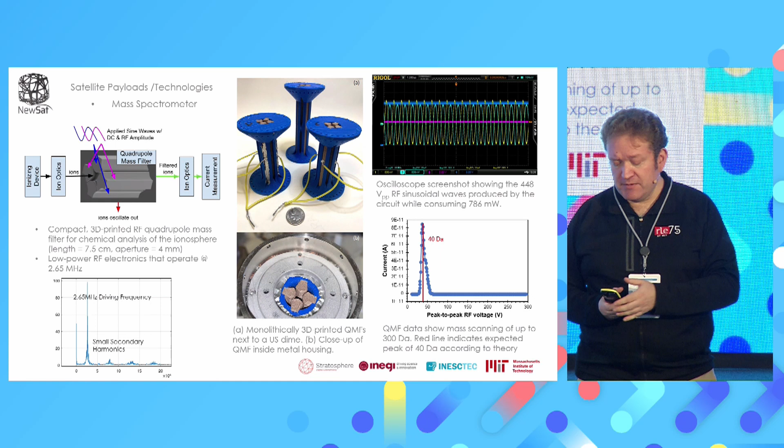In terms of sensors, we have been developing a mass spectrometer. I'm not sure if you're familiar with the technology, but it's the gold standard for analytical chemistry. If you want to know the quantitative composition of something, you use a mass spectrometer. There's a laser, but I can barely see it, so bear with me. In the upper left-hand corner is a schematic of one of these mass spectrometers.

You need a charged mass in order to manipulate it with an electromagnetic field. So perhaps you have an ionizer, or perhaps there are ions already present, which is the case of the ionosphere. The ionosphere is plasma, so we don't need to use an ionizer. Once you have these ions, you can use all kinds of strategies to sort them based on the mass-to-charge ratio, then detect them, and with that you get your spectra.

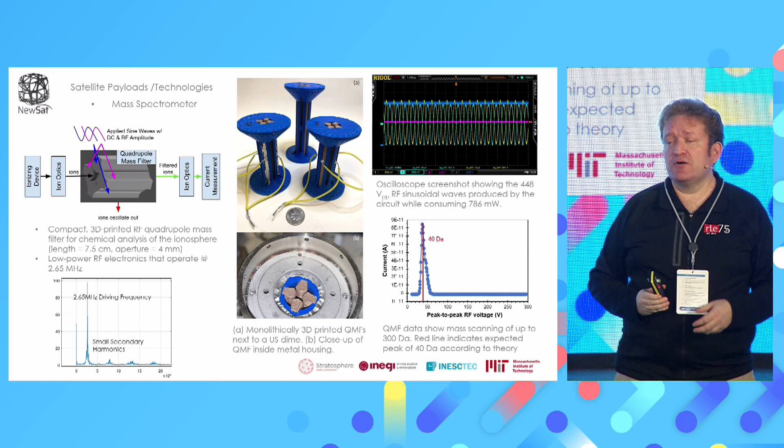So what we did is develop a mass spectrometer based on a quadrupole, which is a type of mass filter that uses RF, radio frequency, signals to filter. I think it's very neat work because it's fully and monolithically 3D printed. You see at the center, at the top, those are the 3D printed quadrupoles.

They're made in a polymer that's called PLA. The part that is like golden, it's the conductive part. So you can actually modify the PLA with nanoparticles to make it fairly conductive, of the order, I don't know, milliohm centimeter, very, very decent electrical conductivity. And then with that, you can make electrodes and all kinds of structures that exploit electromagnetic field phenomena.

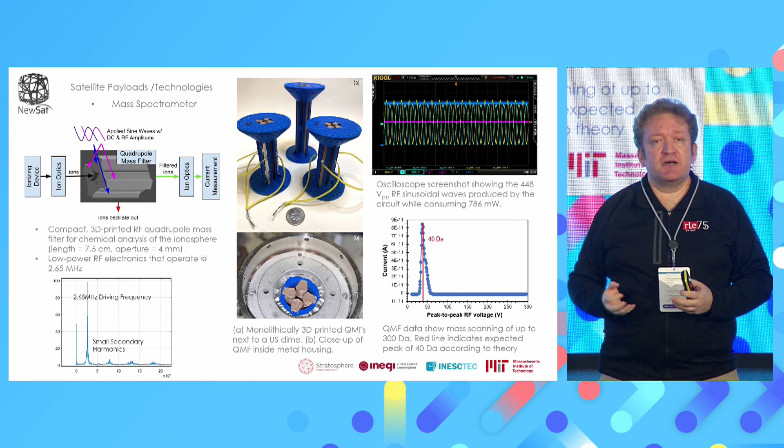It's monolithic, so it doesn't require any assembly. So it just comes like that from the printer. So it's something that is compatible with in-space manufacturing. So there are printers at the space station right now that could do something like this.

And then we also did a lot of work in the electronics. Because maybe you have seen presentations where the gadget is very tiny, but you have like a rack of instrumentation to run it. So that was not what happened. What happened is that we actually put together something that would comply with the limitations of a CubeSat in terms of power and in terms of the size.

So it works at 2.65 megahertz. The screenshot at the top right is to show that these tiny electronics can actually deliver the voltage, which is hundreds of volts at 2.65 megahertz. It consumes, if I recall well, on the order of a fraction of a watt, like 0.8 watts or something.

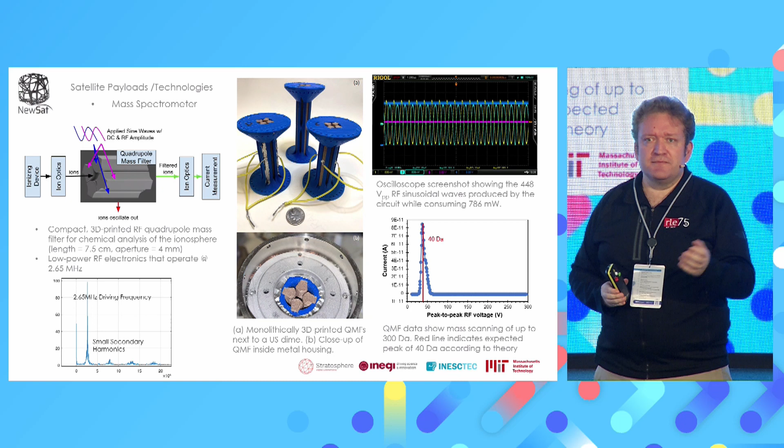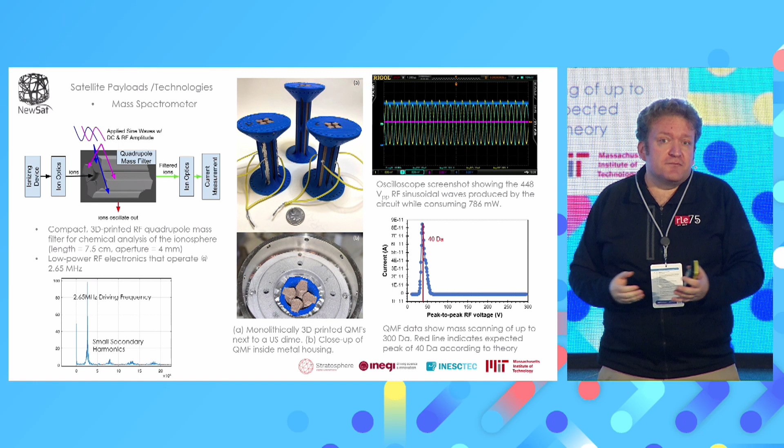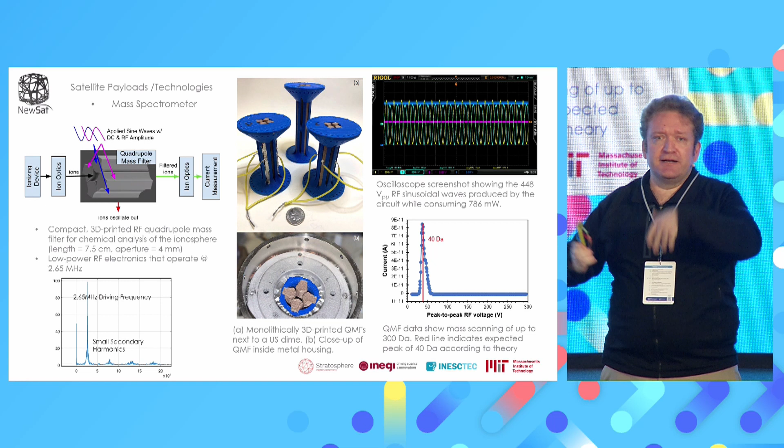And this is an example of the kind of data you can get. So we can sample up to mass 300, but you only see one peak, which is the peak of argon, which is what we were looking for. So in the ionosphere, we're expecting gases like argon, hydrogen, oxygen. So it has adequate range for what we want to see, and it would be fully disposable because the quadrupole is made of polymer. So when you go into reentry, it will just get destroyed by the reentry process, right?

So let's shift gears and talk about a couple of sensors that we did for plasmas, for the ionosphere. So the first one is a retarding potential analyzer. It's a gridded device that basically is used to tell the ion energy distribution, but it can also be used as a mass spectrometer, because if you are in space in an orbit, you are at a certain velocity on the order of kilometers per second, 10 kilometers per second, something like that. And that's a relative velocity, so everything in that reference frame is at that velocity.

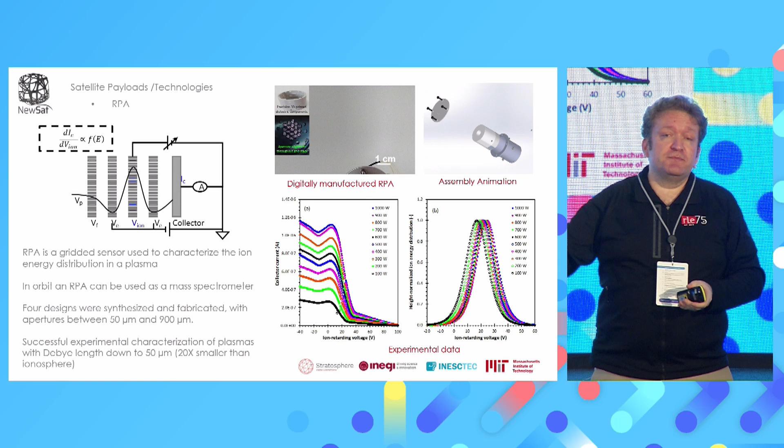So you're going to see shifts in energy based on the mass that you have. So if all the ions are moving at this relative velocity and they have different mass, then I should be able to pick it up by shifts in the energy with this device. So I think that's pretty neat because it works with DC signals, but allows you to do the kind of things that you can do with RF signals, which is what I told you about with the mass spectrometer. So this device is, well, you cannot see it there, I'm afraid, but it's fully digitally manufactured.

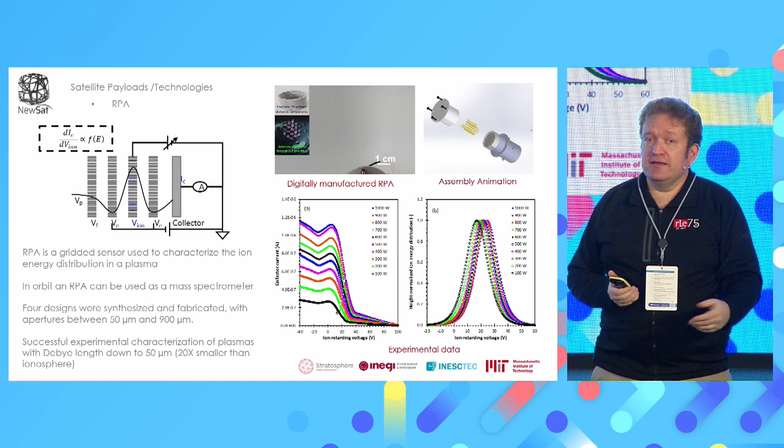It's using our top technologies and commercial technologies, on ceramics, on metals, etc. But I think the thing that is really important is that it works. What you see on the lower right-hand side is data that we actually got. And long story short, these devices work as good, if not better, than the state-of-the-art of RPAs. This is a very good proposition because they are very inexpensive to make, they can be made very quickly, and the bottom line is that they deliver. They actually can generate the data.

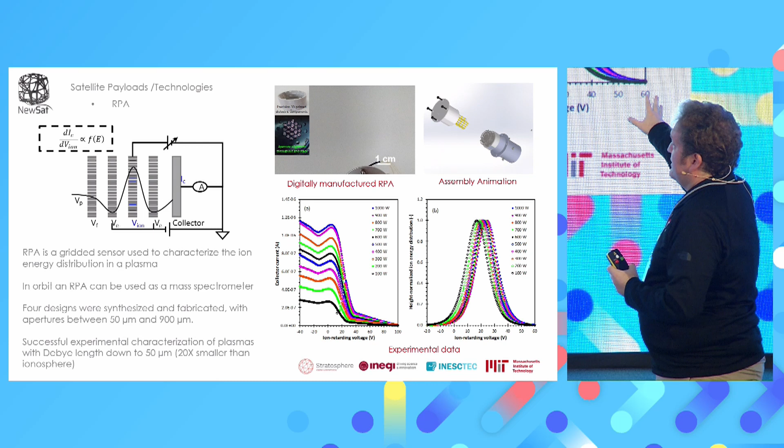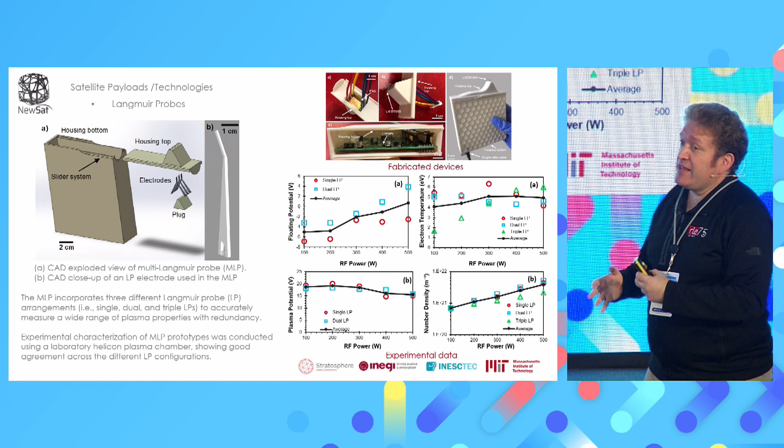So what you're seeing here is some IV characteristics, which is the workhorse for people that do electrical engineering to understand what's going on with the device. And what is at the right-hand side is the processed data showing the energy distribution. So this was done with a calibrated source, so we knew what to expect, and what we measured is what we were expecting.

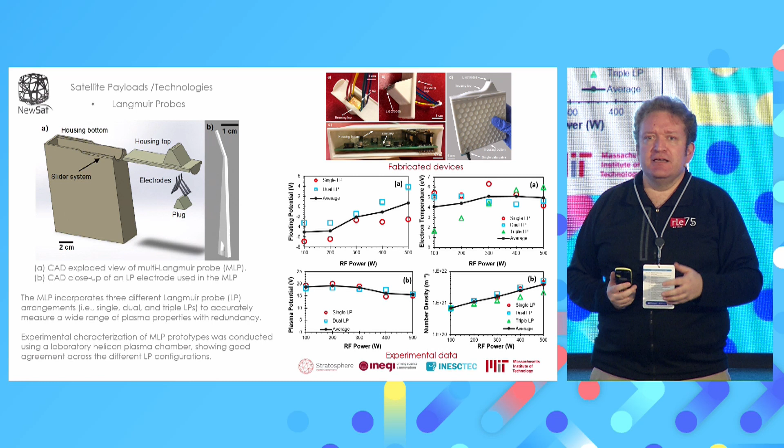The second sensor that we made is a Langmuir probe, and if you have worked on plasma, you know that Langmuir probes are really common sensors. They are basically electrodes that are biased at a certain voltage, and you collect a current, and based on the current and the voltage, you can figure out things if you make some assumptions, right? So there's some model behind it. But they are very robust, they can cover a wide variety of parameters, and people like them.

So we have our own version. It's also fully additively manufactured. We also developed the electronics to run it. I think it's also on the order of a fraction of a watt that it can consume. But it goes beyond that.

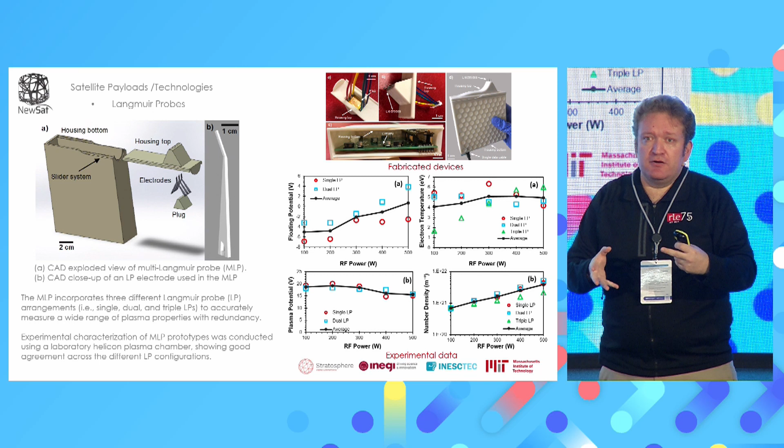It's really neat work because we have this redundancy in the probe, so we can measure in real time with redundancy the parameters of the plasma, let it be number density, electron temperature, the Debye length, etc. So what you see here is this sensor run in control conditions, and you see how the estimates from the different combos of sensors work together. So we have a single Langmuir probe, a double Langmuir probe, a triple Langmuir probe.

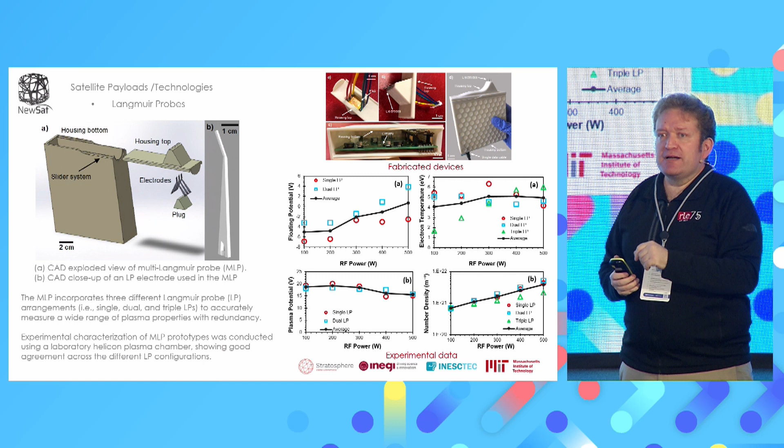And they have different features. So, for example, if you do a triple Langmuir probe, it's the only embodiment that allows you to make measurements in real time, and maybe that's what you need. But perhaps you want to be particularly resilient to perturbations. So in that case, you want to use a double Langmuir probe because it's floating, and then it allows you to basically get rid of these perturbations to first order.

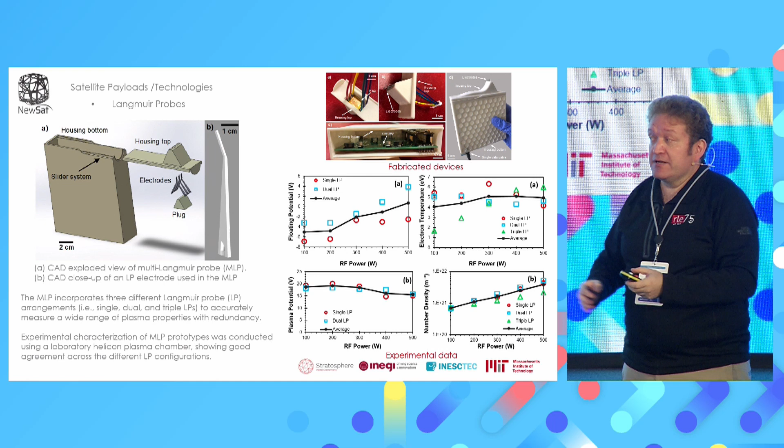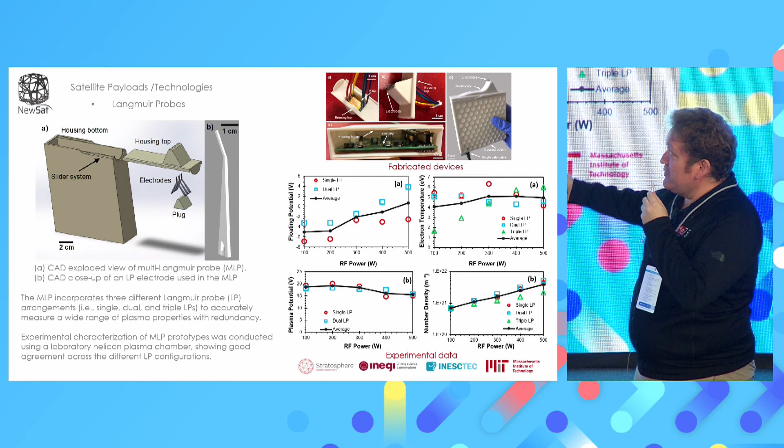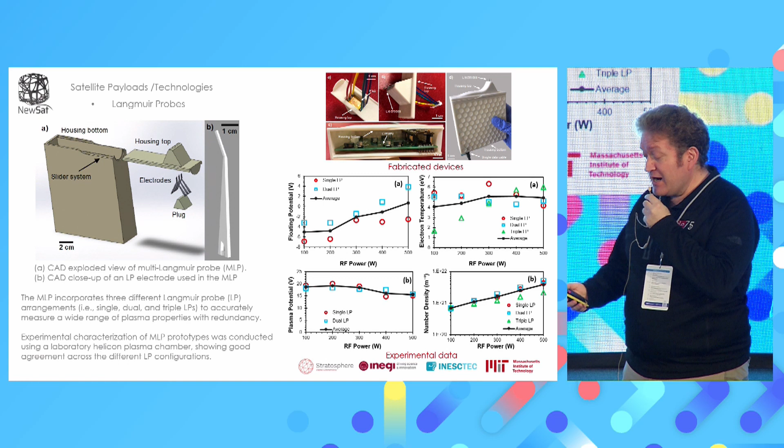But the important part is that the measurements agree. And it just shows this strength of using software like generative design and using the latest technologies in 3D printing to make really compelling hardware. So let's continue.

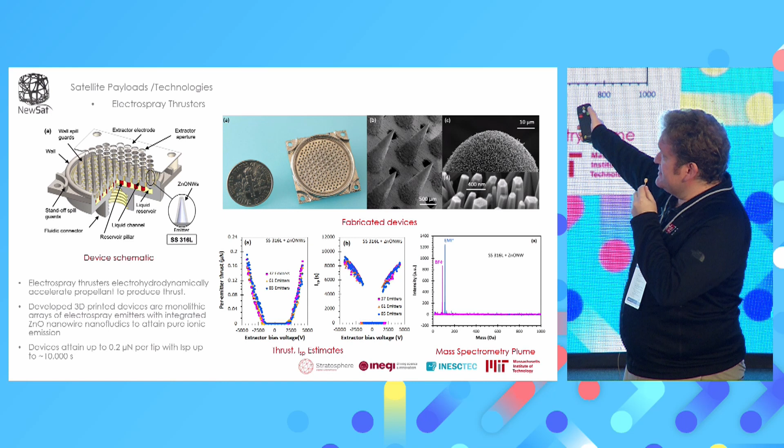And let me talk a little bit about propulsion. So in this case, it's an electric engine, so it uses electromagnetic fields to accelerate the propellant, and that's something that is preferred in space because it's more mass efficient, so you can get more thrust per unit of flow rate of your propellant. So once you're in space, you have a number of options, and chemical propulsion is not necessarily the best alternative.

So in this case, we use electric fields, and this is, again, a design that is monolithically 3D printed, with a certain set of features that allows it to take the propellant, distribute it, put it in the emission sites, and control it. But what is really, really exciting is what it does. What you can see is that it produces on the order of a fraction of a micronewton per tip. You can easily put thousands of these tips in a small area, in square centimeters.

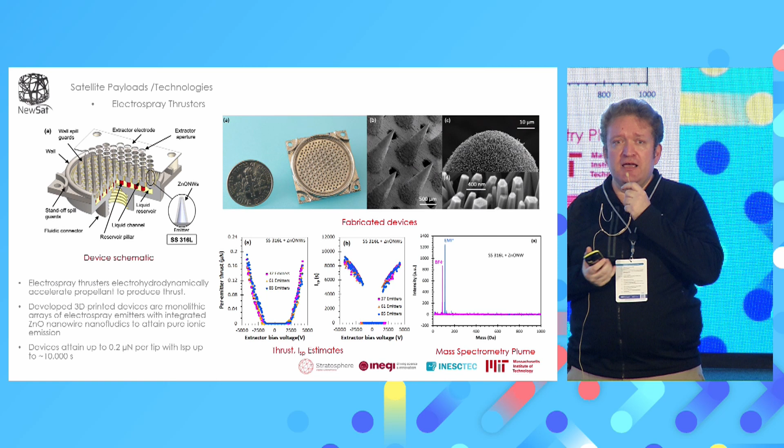And what it emits is these pure ions. And what is related is that this engine has the highest ISP, the specific impulse that you can get for this kind of engine, and it's because the emission is monochromatic. And we believe that was enabled by 3D printing and these zinc oxide nanowires.

Now let's shift gears and talk a little bit about other work done at MIT. The first one is led by Maria Yang. She looked into many things, but what I wanted to tell you today was about two key ideas. What she said is, okay, we have this excellent technology. How can we put it together? Meaning by that, human designers that are well versed in designing, and this thing called generative design.

So generative design allows you to do things like what you see at the upper left: you design something just by first principles, you get this, but you can certainly reduce the weight a lot more and perhaps be more effective if you use generative design, which is something related to artificial intelligence. So the first question that she wanted to address is whether the two things can coexist. Instead of bumping heads, can you guys just work together? And the answer is that, yeah, you can if you divide the work.

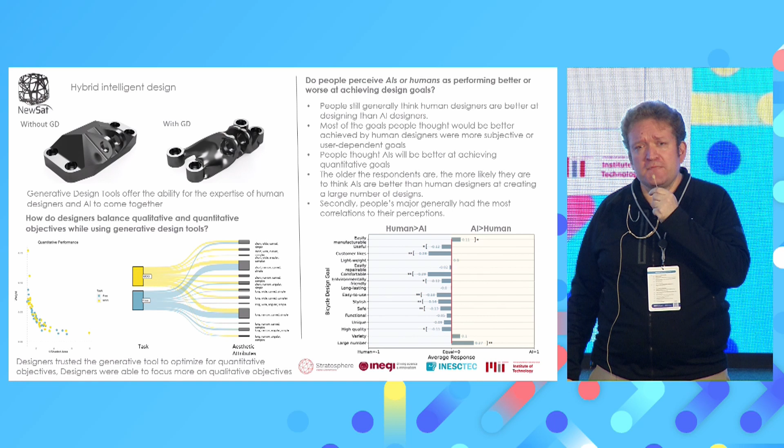And by that I mean whatever is quantitative, you can let the generative design do it. And the reason for that is that you can put in quantitative inputs. And whatever is qualitative, so does it look good, is it comfortable, is it practical, well, that's something more about having the human touch and the sensibility for that. So that was the first question that she successfully addressed.

The second one is, what's the perception? It's a very different thing. Perception doesn't mean what has actually happened, but what people think happens. And what she did is get a bunch of volunteers and ask, for a particular example of, okay, I'm going to make these bikes, and on the one hand, I have these engineers that are very well versed, and on the other hand, I have artificial intelligence.

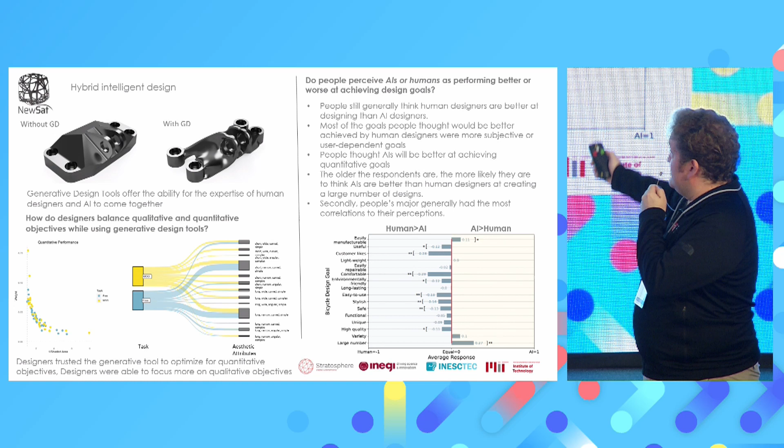So under these metrics, which one do you trust, which one does it better? And the consensus seems to be that people think that humans are better, except when it deals with things like mass production or things where perhaps the human capability cannot put up with that. Like, okay, I want to generate a great number of designs of bikes. Perhaps that's something better suited for artificial intelligence.

But I think another thing that is important, it was interesting in this study that Maria did, is that they found that the more you know, the more you respect artificial intelligence. So the older you are, perhaps the better you understand what it takes to put together a successful design, and then you understand that it's not as easy. And the more advanced your education, the more you respect the new tool.

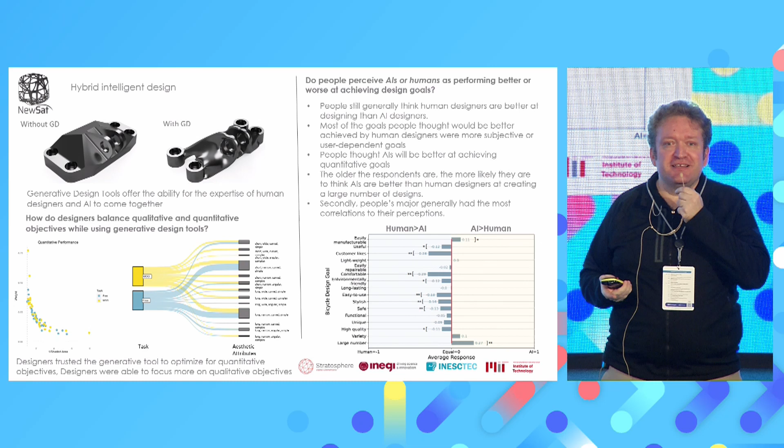Let's shift gears and talk a little bit about metamaterials, but with no intention to steal thunder. We're going to talk about that later in this presentation. But all I wanted to say is that Wojtek has been doing this amazing work on metamaterials. If you're not familiar with metamaterials, well, these are mesoscale structures. So at the micro scale, you have the molecules, the atoms. Then at the macro scale, you have the object that you are designing.

So these sit in the middle, and what they do is tailor properties, be it optical properties, stiffness, density, etc. And that's what makes them so exciting, that it's like creating new materials without actually having to create new atoms and new molecules. So if you want to use metamaterials to find some optimum, you have to go through a lot of iterations and a lot of possible cells.

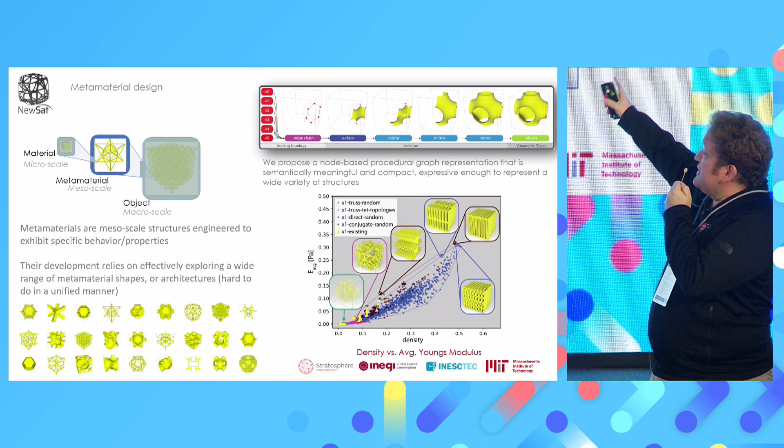So you see on the lower left-hand corner, there are all kinds of unit cells that you could try. And perhaps there are far more than you can imagine. So how do you go about that systematically? And what Wojtek and his team found is that there is a way to describe them with graphs that is very efficient, that banks on things like symmetry and similarity and mirroring certain structures. And with that, they have been able to show that the same structures can span a very wide range of properties, which is what you want, remember.

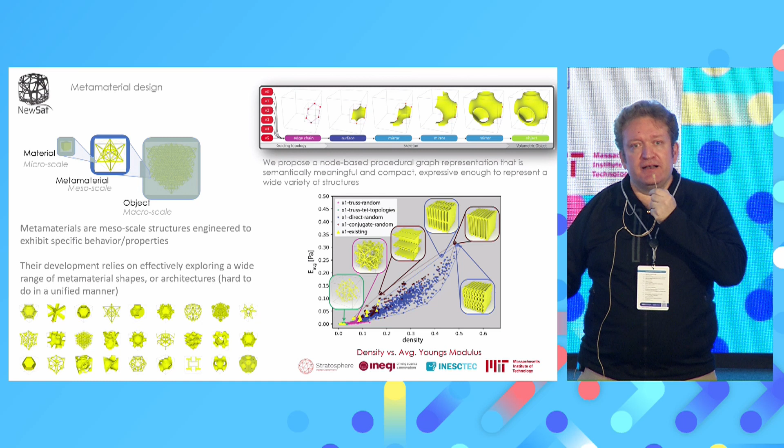So how does nature get the performance it has? Well, it does something similar to this. Everything is made with carbon chains, but perhaps they're packed in a certain way to make them stiff, and packed in a certain way so that they have these voids and perhaps can insulate better for sound or for temperature, etc. But it's basically the same molecules. So this is along the lines that I can use these cells and tune them so that I can span a wide range of physical properties.

And with that, I'm going to give the microphone to Nuno, and let's hear what they did with metamaterials and satellite testing. Thank you. So I'll see if I can, you've seen my back. I'll see if I can do this without losing my mic. But you can hear me well, everyone, yeah?

Okay, so let me just try to continue what Luis was saying with some of the things we've been doing. So one of the things we were doing in Portugal was thinking of a way to package these instruments in an innovative way that continues the trends in the project of looking into generative algorithms and additive manufacturing on every level of what we were doing, right? And in this case, we're looking at the structure itself. And I've got a small demonstrator here that we've done.

And to do this, we were really looking into advanced materials. And we were really interested, and we did a PhD on this related to the project, in how we could use topology optimization to work with continuous fiber composite materials. This is still new today. It's still an emerging field. But it was something we were thinking of in 2018 or 2019 when we wrote the project. And certainly it allowed us to get to some really interesting results. One of which was, for example, that compared to typical aluminum construction, the design can save around 35% of the weight.

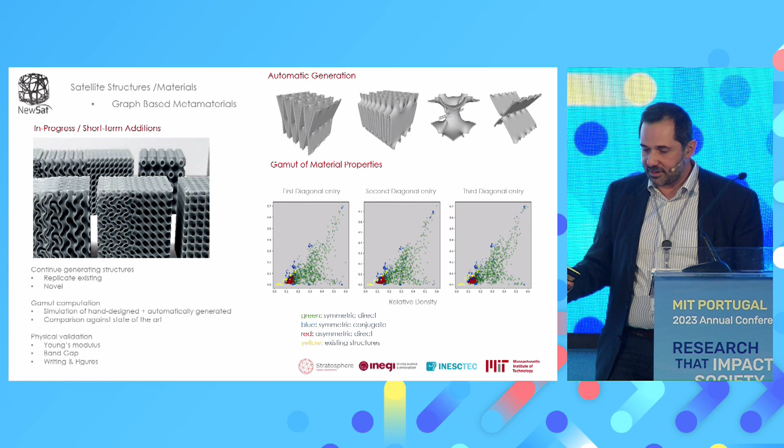This is something that I think is the continuation of what was being discussed. So there's a lot of work on how we can actually link the work that Matusik was doing at MIT with actually manufacturing some of these elements and understanding the properties of what we can get.

But I think, Gustavo, if you want to take the next stage. I can go from this side, probably. So this is what we have done in Stratosphere, what we call the more digital part of the project, let's say.

One of the things that was developed during the project is what we call a digital twin of a satellite. We have developed several things related to the implementation of a digital twin of a satellite. The first thing important to understand is that a digital twin of something needs something that will gather data on the spacecraft.

So what type of data can we gather? Things that come from the normal instrumentation that should be on the spacecraft, also from the payloads we are installing, and also from the structural behavior, which was the first idea really - just to have a very good understanding of the status of the structure after launching, and before and during deployment of the satellite.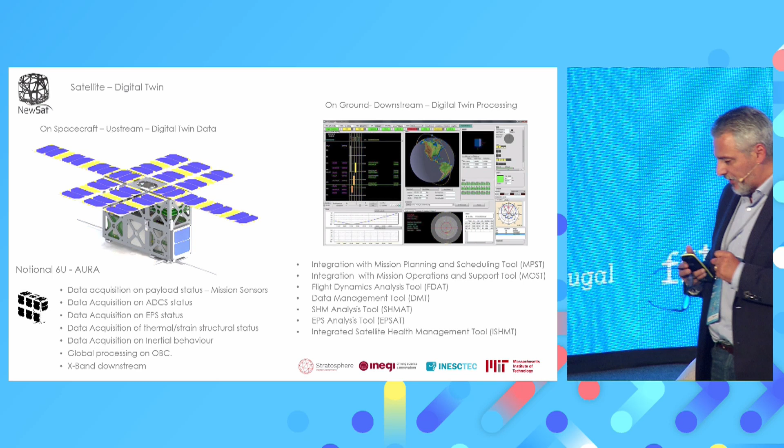So there are things related to what we put in the satellite and what we should communicate downstream to our ground control stations, to be able to understand better the behavior of the satellite under certain conditions. Two things to be stressed: first, during an orbit - and probably this is nothing new - there are certain points on the orbit where we can download certain information.

Some information is more important than other. Normally the status and health of the system is in the second layer of information that we transmit downstream. So we have to pick up what type of information we take from the satellite at each moment, and how we can reproduce the behavior of the satellite on the ground.

Passing to the ground part: there's something that gathers the data coming from the satellite and integrates it with specific tools you normally have when operating a satellite. This includes mission planning and scheduling, integration with operation and support tools, correlating satellite status with flight dynamics, a data management tool to track information over long operation periods, tools focused on structural health management, energy system behavior, and an overview of satellite status to determine if it's in condition to perform the intended mission.

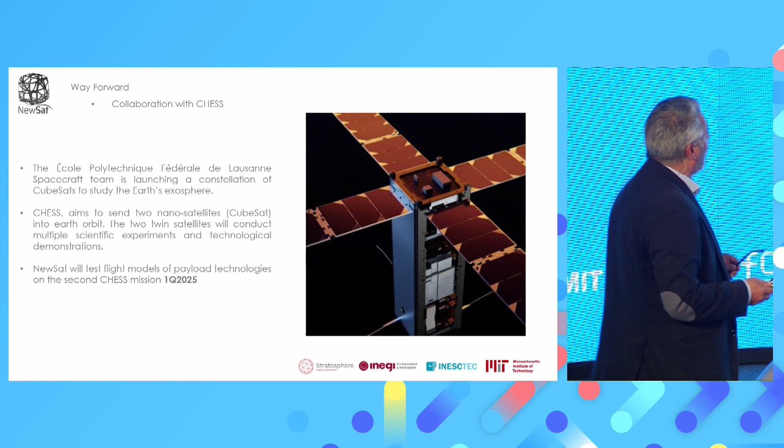Almost at the end, so be patient. Our way forward from this moment to the future: we have a good collaboration with a program called CHESS, from École Polytechnique de Lausanne. They are also working with nanosatellites, CubeSats. They have a 6U solution and will launch in the first quarter of 2025.

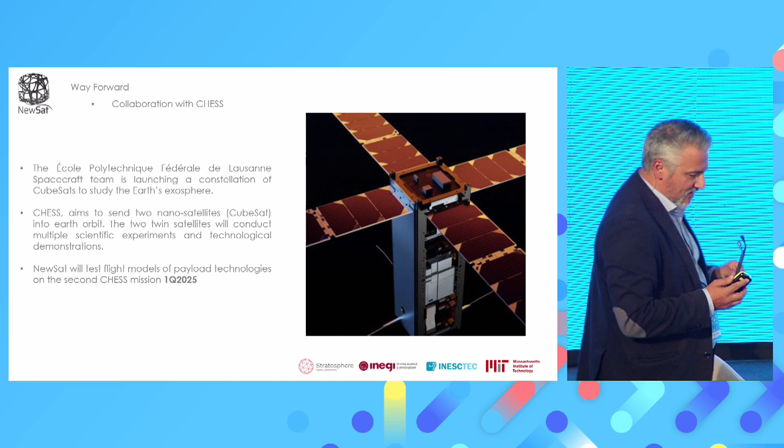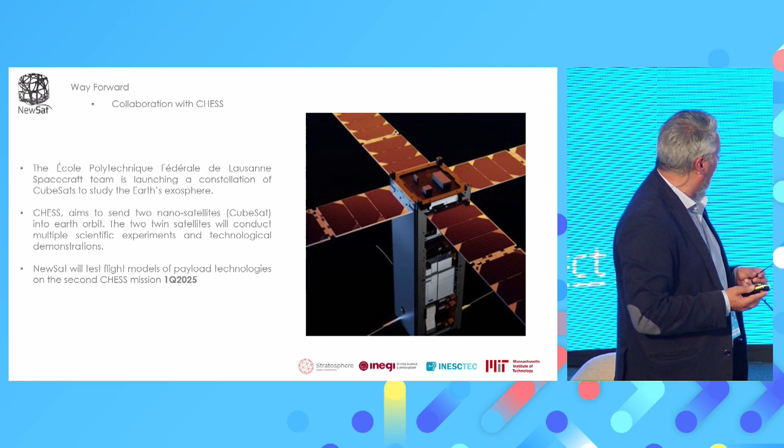Our plan is to put flight models of the payloads, or at least one flight model, piggybacking this satellite to get flight hours for the solutions we're developing here with MIT. This is a way to debug any problems that can happen with these new payloads we developed during the project. So this is one of the actions being taken.

We are preparing a new venture called Stratosphere Space Systems. We are actively raising capital, and if everything works well, we start the company early next year. Everything we've talked about here will be developed within that new company and brought to market. That's the plan for Stratosphere over the next 3 to 5 years in terms of this new venture.

That's it. Thank you for your patience. Thank you very much.